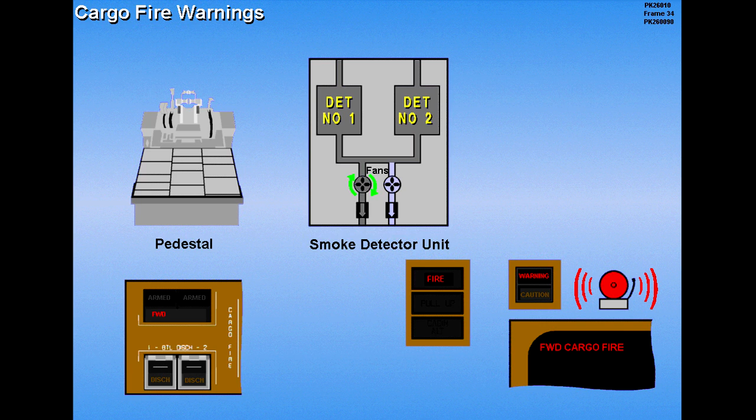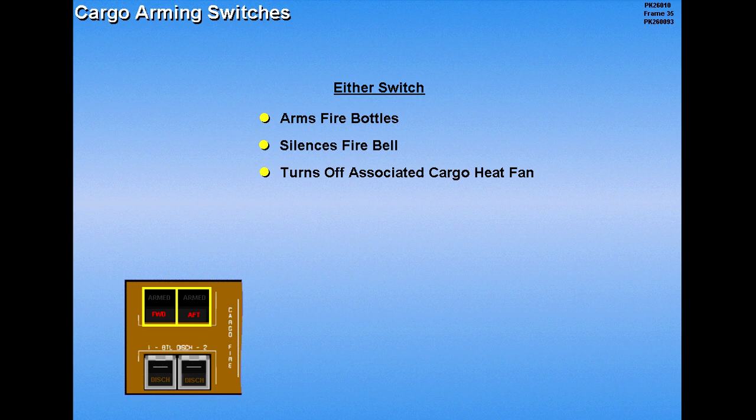Pushing either cargo compartment arming switch arms both fire bottles, silences the fire bell, and turns off the associated cargo heat fan. Pushing the forward arming switch also turns off both recirculating fans and opens the overboard exhaust valve. Pushing the aft arming switch also turns off the right recirculating fan and turns off the aft cargo heater.

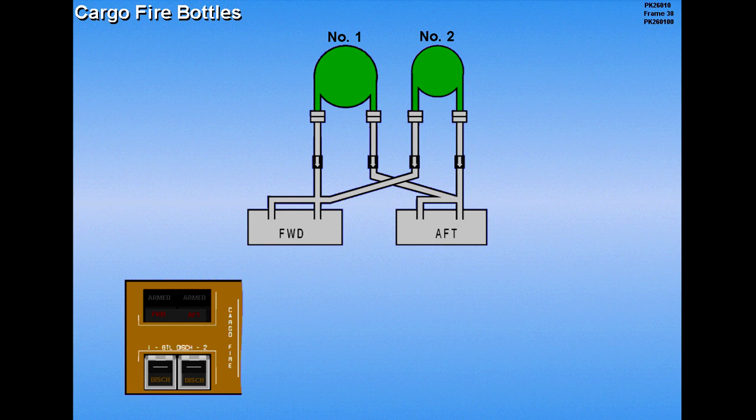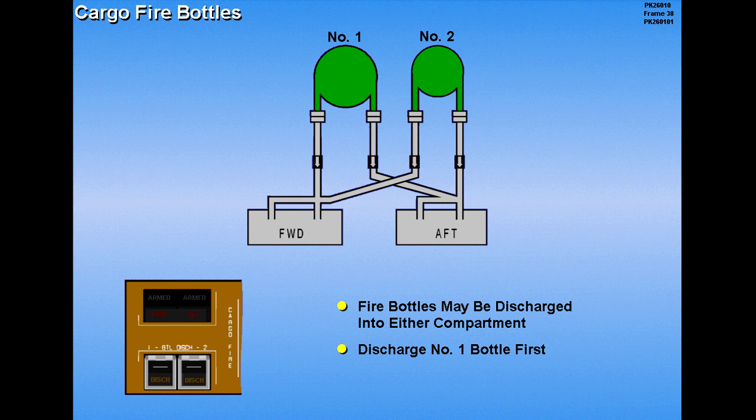The two cargo fire bottles may be discharged into either compartment. Discharge the number 1 bottle first, since it is larger and contains a greater amount of extinguishing agent. To discharge the bottle, lift the associated guard, and then push and hold the number 1 bottle discharge switch for 1 second. The extinguishing agent will flow into the respective compartment, as indicated by the discharge light illuminating, accompanied by an EICAS message.

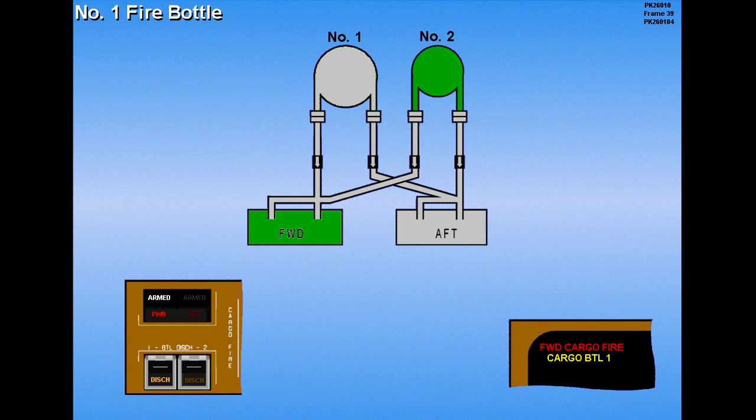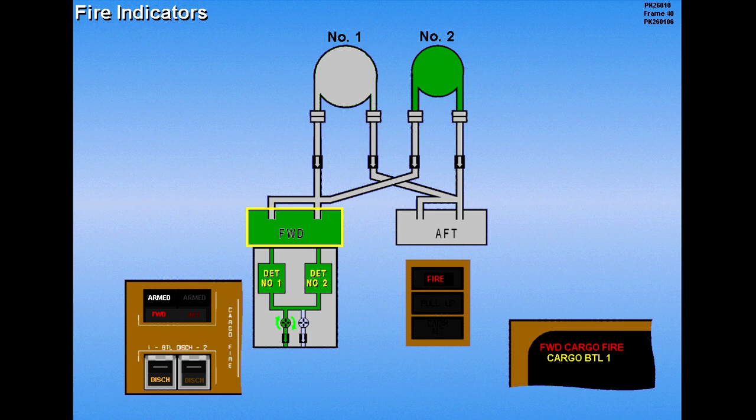A concentration of extinguishing agent will remain in the compartment for some time. Consequently, because the smoke detectors cannot differentiate between the extinguishing agent and actual smoke, the fire indications can remain after the fire is extinguished. To maintain a high concentration of extinguishing agent in the cargo compartment, the number 2 bottle should be discharged after a specified amount of time, as indicated in the pilot operating manual.

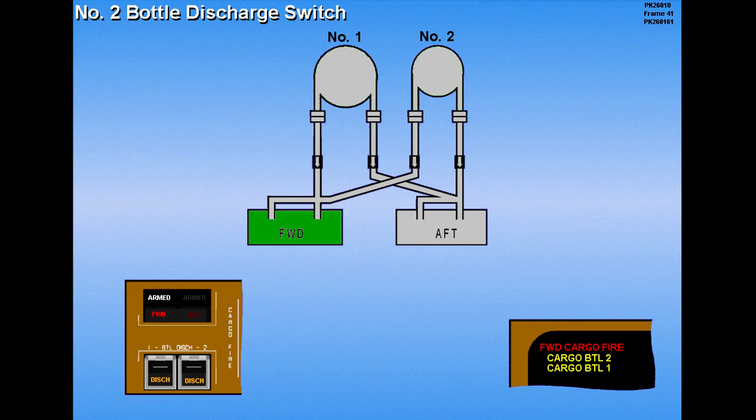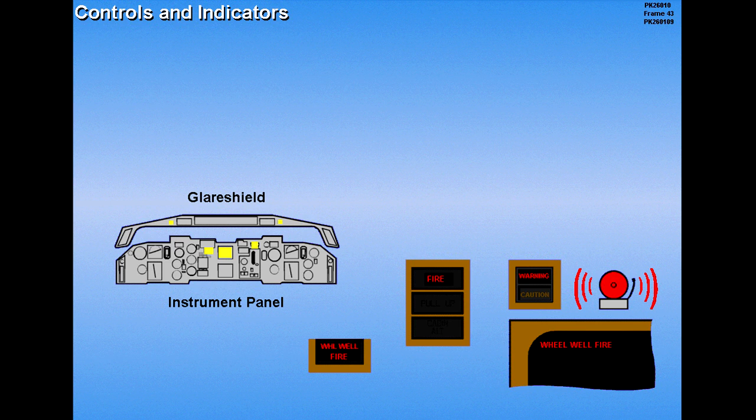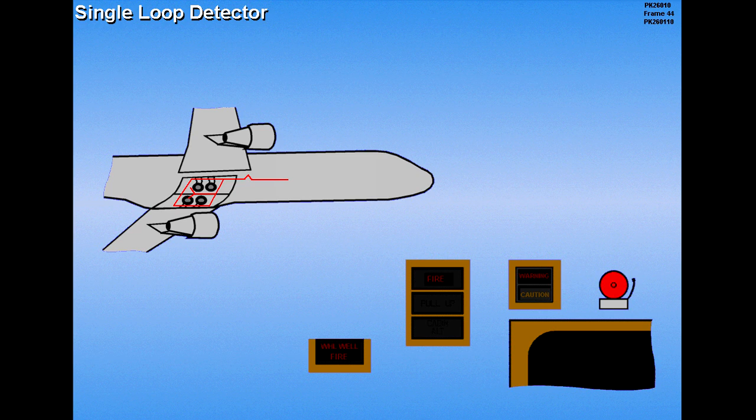Now let's look at wheel well fire detection. The wheel well fire controls and indicators are located on the glare shield and instrument panel. A single loop detector is installed in both main gear wheel wells. When the loop detects an excessive temperature, a fire warning results.

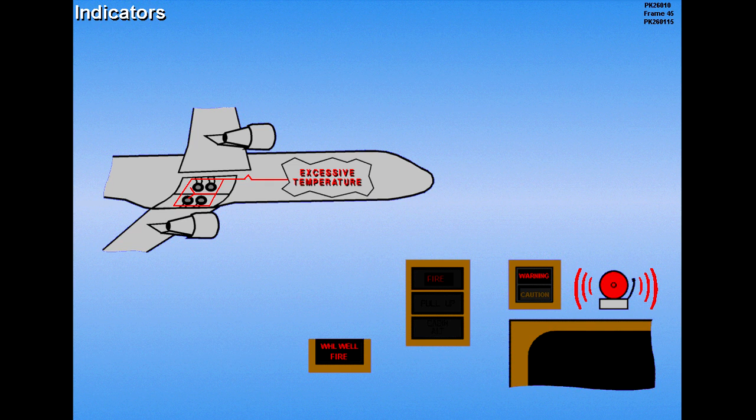The warnings include the wheel well fire warning light, the intermittent fire bell, the master warning lights, the discrete fire light, and the respective EICAS message. The wheel well fire light, the discrete fire light, and the EICAS message remain until the condition no longer exists. There are no fire bottles for the wheel well.

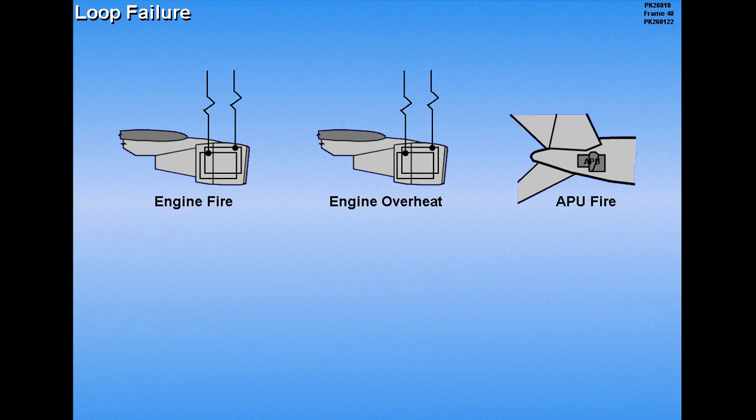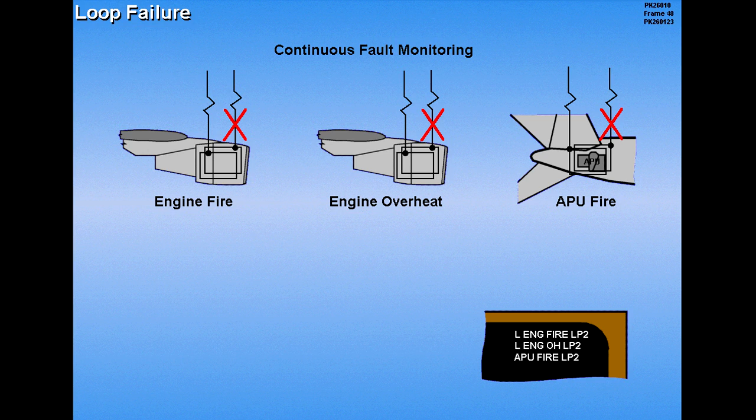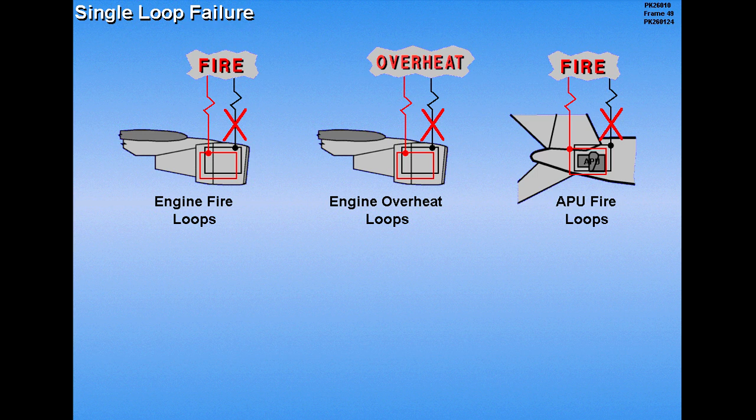This part covers the fault detection system. The engine fire and overheat detection system, as well as the APU fire detection system, have continuous fault monitoring. If one of the dual loops fail, the appropriate message appears on the ICAS status page. With a fault in one detector loop, the remaining loop will still sense a fire and initiate all cockpit indications. A fault in both loops will cause a failure of the detection capability.

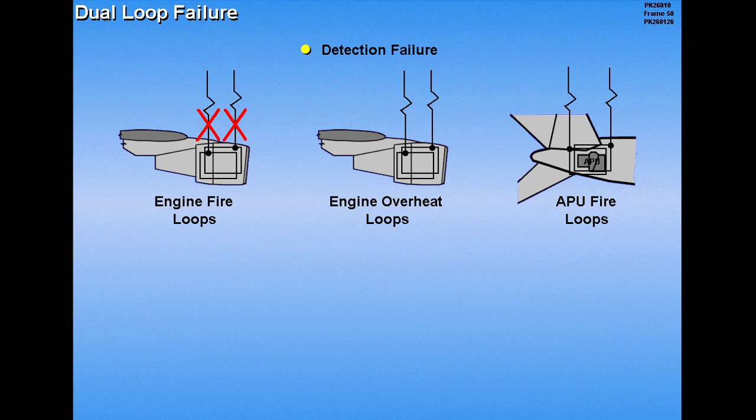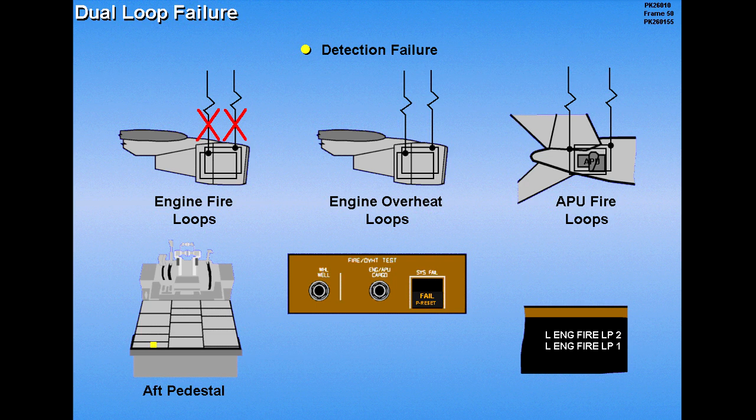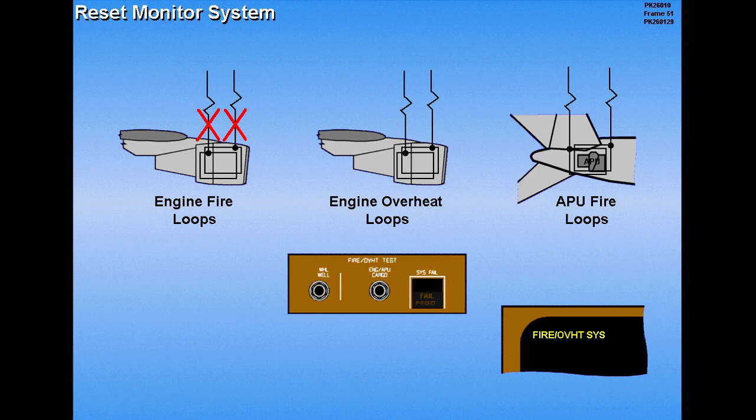Should a dual loop failure occur, the system fail light on the aft pedestal illuminates, and an associated EICAS message appears. The status page must be viewed to determine which system has failed. Pushing the system fail switch extinguishes the light and removes the EICAS message. The failure monitor will reset for the remaining systems.

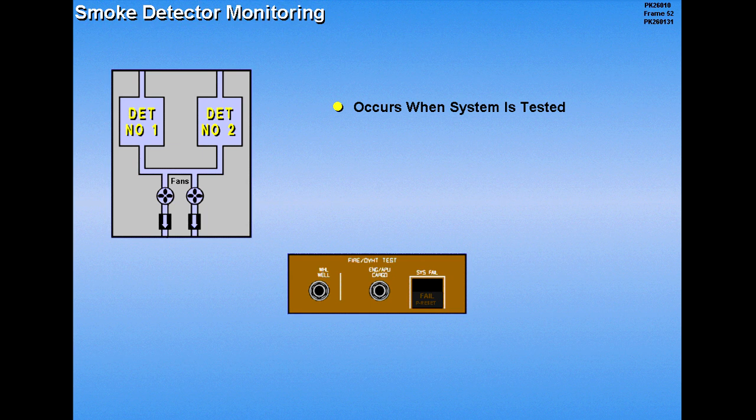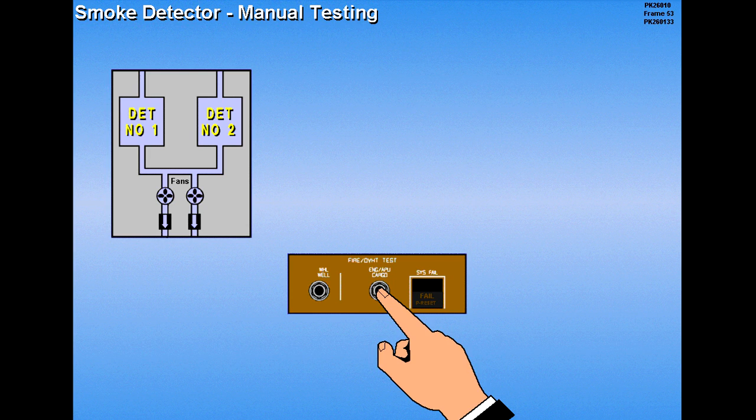Fault monitoring of the cargo smoke detectors occurs only when the fire protection system is tested. Automatic testing occurs when electrical power is initially applied to the aircraft and during power transfer. Manual testing is accomplished by pressing the engine APU cargo fire overheat test switch. When a fault is detected, the system reconfigures itself for a single detector operation. A single operating smoke detector is still capable of activating the cargo fire warnings.

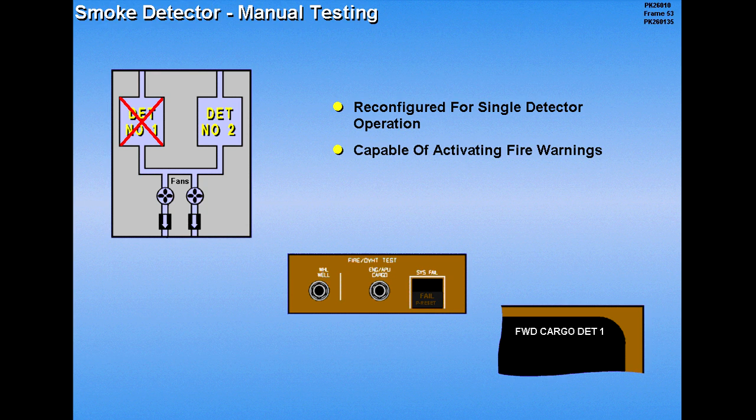If both smoke detectors are inoperative, the system fail light illuminates, accompanied by the associated EICAS message. A status message will appear when selected.

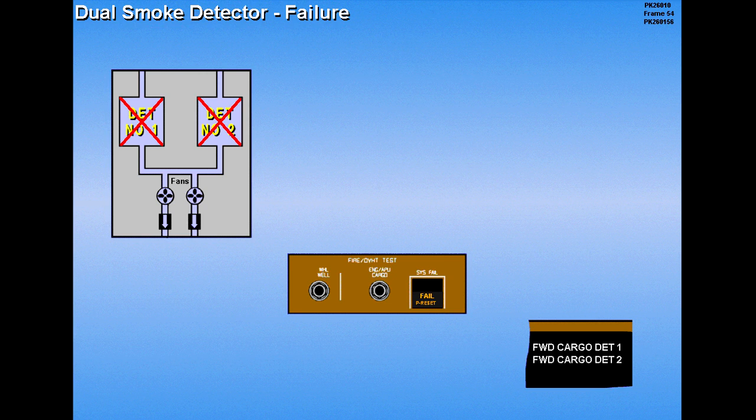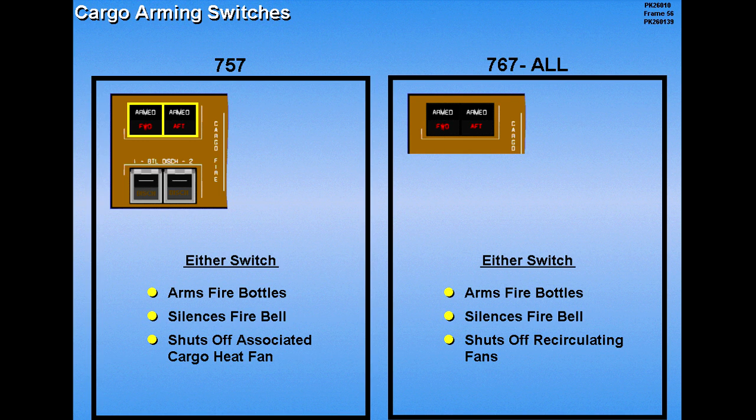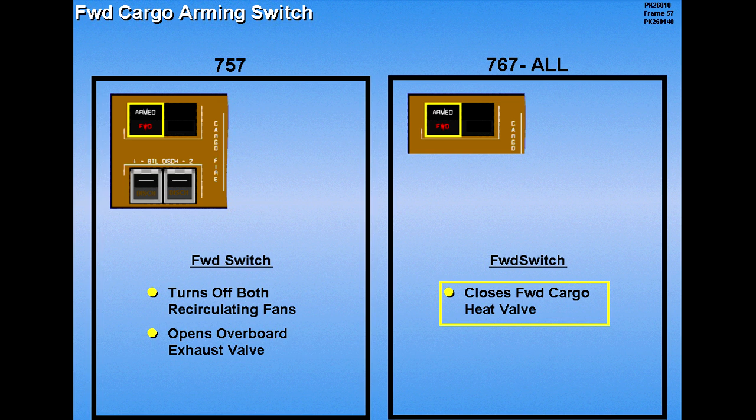Now let's discuss 767 differences. On the 767, pushing either cargo compartment arming switch shuts off both recirculating fans. The forward arming switch closes the forward cargo compartment heat valve. The aft arming switch closes the aft and bulk cargo compartment heat valves.

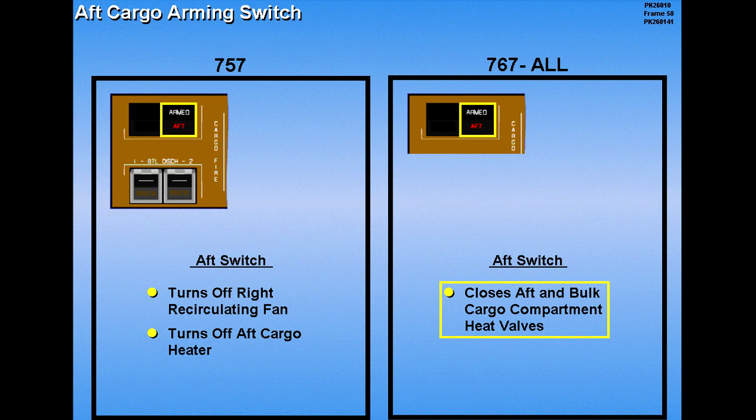Smoke detection is provided in 3 cargo compartments. On the Dash 300, 2 bottle discharge switches are replaced with a single switch. Pushing the bottle discharge switch discharges the number 1 fire bottle in the associated compartment. Pushing the switch also initiates a timer that automatically discharges the number 2 bottle 30 minutes later or at touchdown, whichever occurs first. The extinguishing agent is metered into the affected compartment to maintain the required concentration of extinguishing agent.

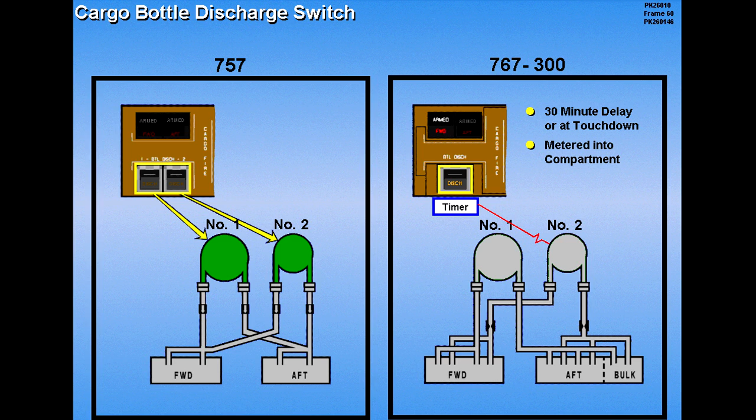The Dash 300ER has 3 cargo fire bottles. Pushing the bottle discharge switch discharges the number 1 bottle into the associated cargo compartment. Also, the timer initiates automatic discharge of the number 2 and 2A bottles 30 minutes later or at touchdown, if less than 30 minutes. The extinguishing agent is metered into the affected compartment to maintain the required concentration of extinguishing agent.